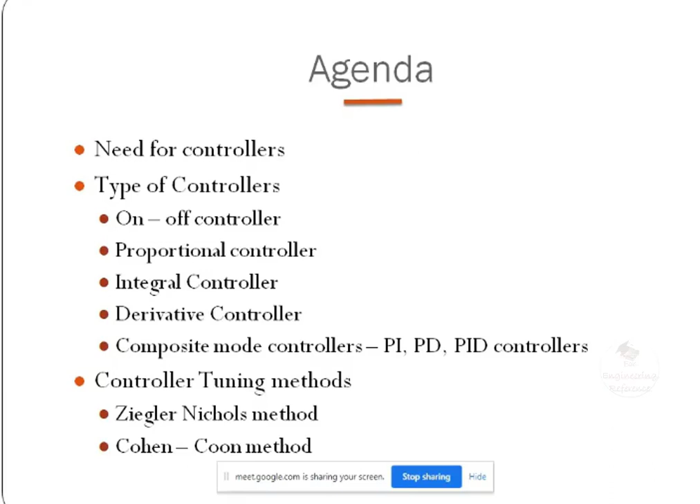Okay, so before we go to the regular presentation, what do you mean by a system? System is a group of components connected together to perform a specific task. Okay, so which means you people have gathered in ECE. The specific task is to get the bachelor degree in electronics and communication engineering.

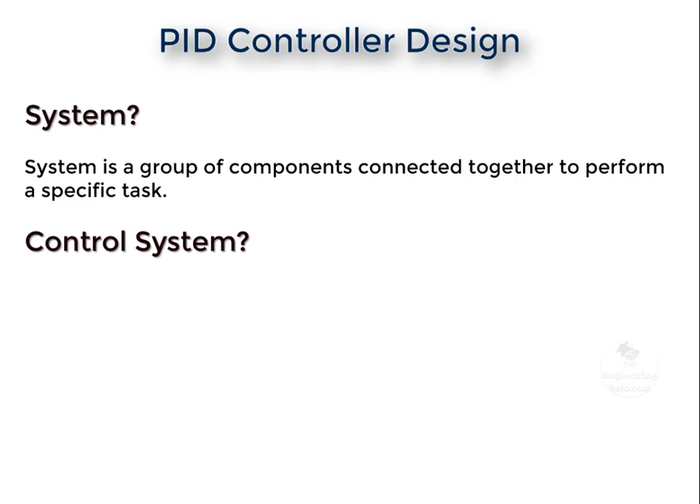But what do you mean by control system? Which means you have some control parameters like your class advisor, your HOD, your dean, like that. You have certain administrative roles. No? What is the purpose of those roles? Those people will work for you in order to make you reach your aim. What is your aim? To get the degree in electronics and communication engineering.

Okay. Likewise, system is classroom. And control system means the classroom with the controller, so-called faculties, HODs, deans, and whatever administrative roles you want to have. Right? So that is the difference between system and control system. And again, coming to control system, we have two major categories, namely open loop system and closed loop system. Right? What do you mean by open loop system and what do you mean by closed loop system?

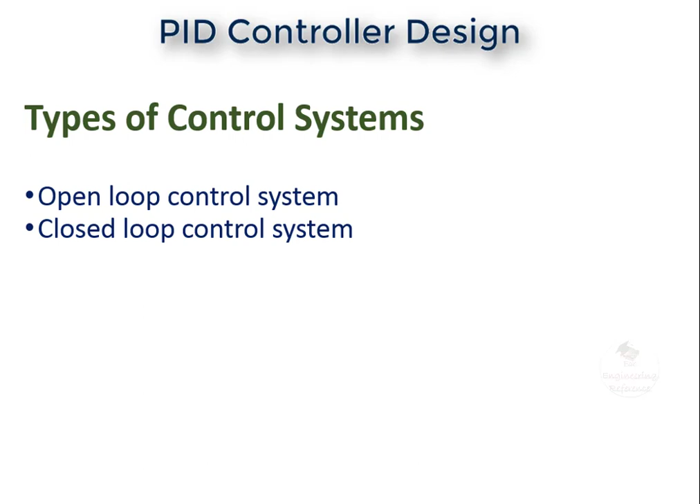Sir, open loop system, we can say in layman language, is a system without feedback. Open loop system, without feedback. Closed loop means? With feedback. Okay, good, good. So open loop system means we people are there, we are acting as a control system, we'll give the lectures and we will evaluate your paper and we are giving marks to you. That is your open loop system.

Closed loop system means based upon the marks you have obtained. Actually our aim is to get the pass mark. In our institution we have 50 as a pass mark. So 50 is my aim. If some student is getting 40, 45 marks, what is the difference? Some 10 marks, so why has he failed, and what action can I take on him in order to bridge the gap? So that is the role of a controller. So if you are acting based upon the feedback, that is called closed loop control system.

Open loop control system means we don't have any parameters, we don't have any feedback, we just give the input, observe the output and change the mode of control, that's all. Okay, so practically, if we say our traffic light control system is an open loop system, do you all agree with me? Because the purpose of traffic light control is to reduce the traffic at the signals. But what are we actually doing? We are not taking the human density anywhere, we just openly give 1 minute for all the roads, right?

If you are giving 60 seconds or 30 seconds for a particular road, on some other side we may have large numbers of people. So density may be increased. What is my ultimate aim? To reduce the people density. But because of our poor control actions, density may increase. Which means we are taking some control actions, but not based upon the feedback. So traffic light control system is a good example of an open loop control system.

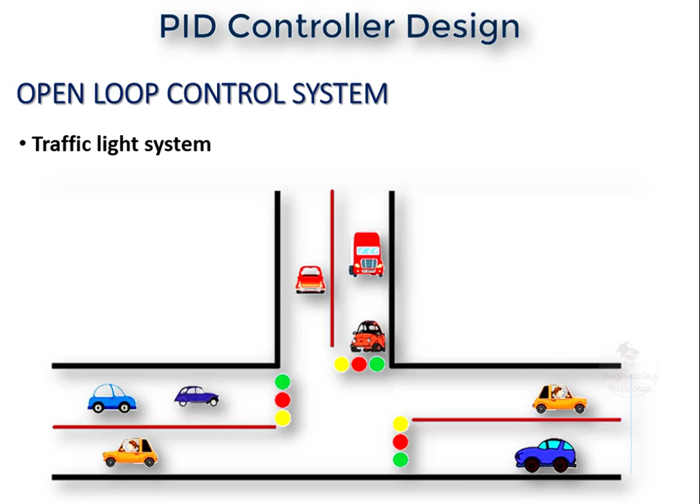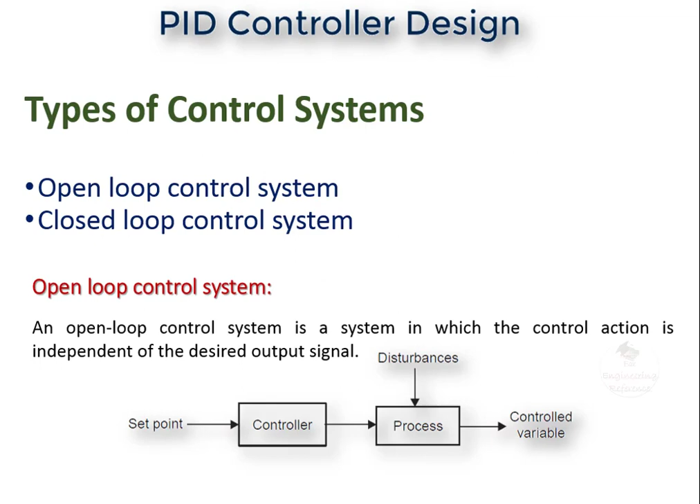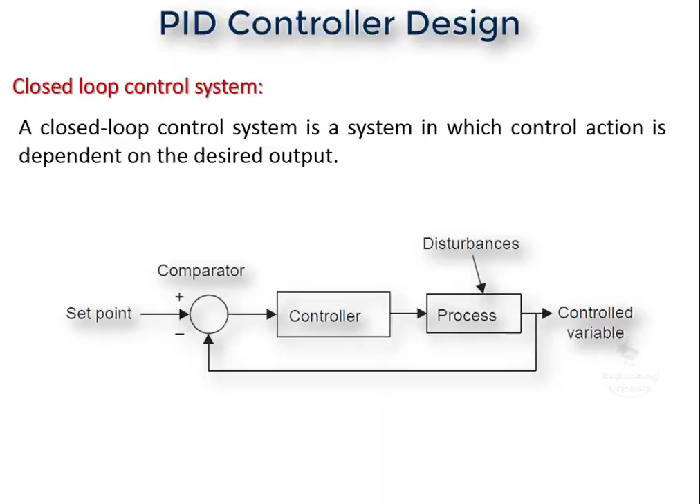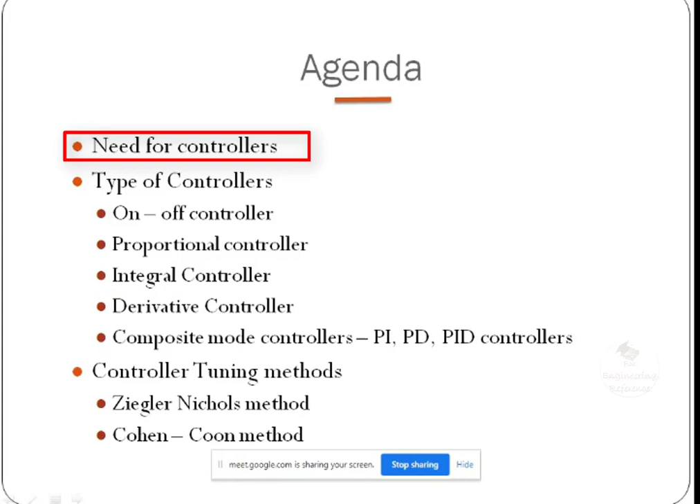Okay. So we have studied system and we have come to control system. In control system, we have classified two types, open loop system and closed loop system. So wherever you take control actions, there is a role for the controller, right? So what are the types of controller? That is what we are going to study in this session. First, we have discussed the need for controllers. Whatever control action we want to take, the controller will play the role. What control action I have to take and how I can make the system reach the set point, all those responsibilities lie with the controller.

Okay. Then we come to types of controller. Elementally, they started with the on-off controller. Then we migrated to proportional controller, integral controller, derivative controller. And composite modes are also possible: proportional plus integral, proportional plus derivative, proportional plus integral plus derivative. So all these combinations are possible.

Then controller tuning method means, if you have a particular type of controller, what gain value we should have, and depending upon the gain value, how we can design the controller. Those things will be taken care of by the Ziegler-Nichols and Cohen-Coon methods. These two methods determine what gain value we should have in order to make the system reach the set point. So there are two methods, Ziegler-Nichols and Cohen-Coon.

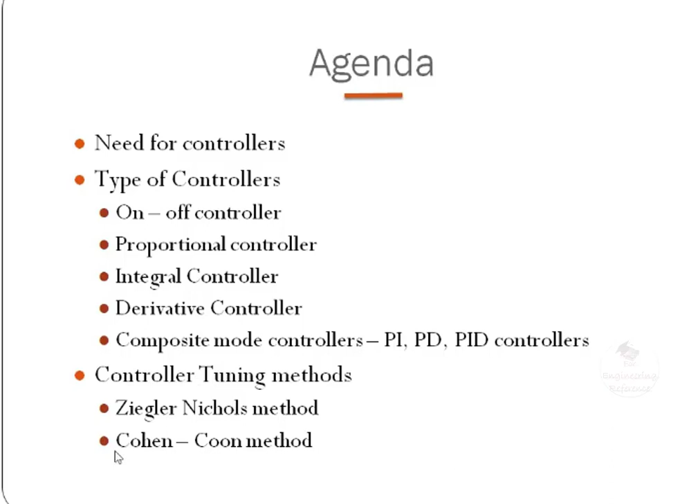Need for a controller: reference input, error, controller, control signal. Whatever error we have, that error is given to the controller. The controller decides what control action to take, which becomes the control signal, and this is given to the controlled plant where the final control element exists. The final control element is the person responsible for receiving the command signal from the controller, taking its order and executing it. Whatever is decided by the controller, this final control element executes, and that output is taken as feedback to compare with the set point. So our controller plays the crucial role - what control action has to be taken is decided by this controller.

In an on-off controller, we have only two options, either 0 or 1. Example is water heating - we insert the heater, which produces heat to increase the temperature. If we want to reduce the temperature, we just take it outside. We cannot decide what amount of heat has to be given - either we give 100% heat to the water, or we don't give heat at all. Only two things may happen: Boolean, either 0 or 1.

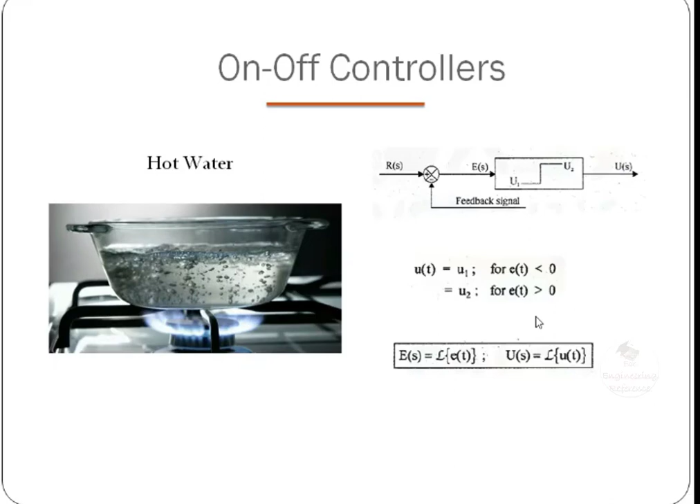So this control action u of t will be taken: u1 if error is less than 0, u2 if error is greater than 0. That's all, only two possibilities. If we want to increase the water temperature, we'll immerse the heater; if we want to reduce it, we remove it entirely. We cannot give 50% heat, we cannot give 60% heat - only 0 or 100%.

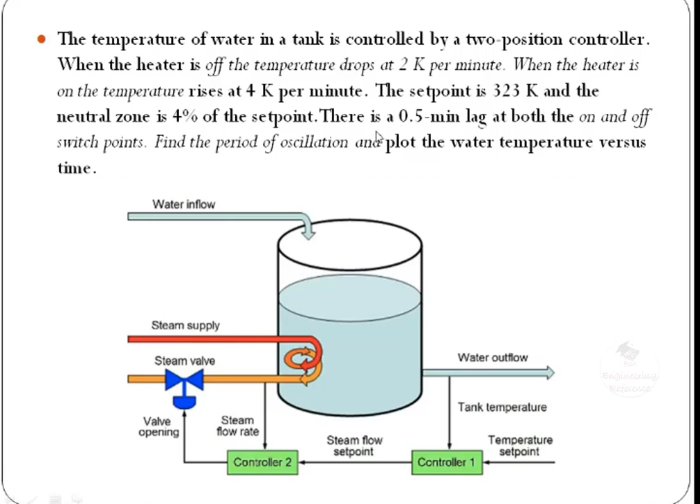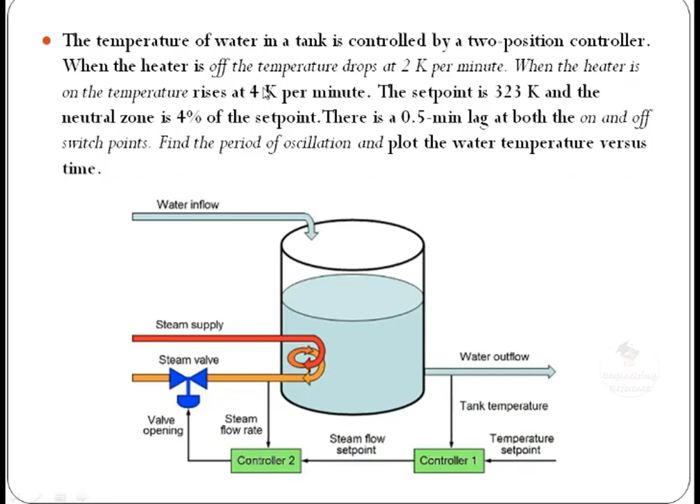On-off controller examples - see the same example. The temperature in the tank is to be controlled by a two-position controller. When the heater is off, the temperature drops at 2 Kelvin per minute - switching off the heater means we disseminate no heat, so per minute 2 Kelvin is reduced inside the water. If the heat is on, meaning we give supply to the heater, it starts giving heat to the water, so 4 Kelvin per minute will be increased.

I want to make the set point 323 degree Kelvin, and the neutral zone is 4% of the set point. Neutral zone means 323 with 4% gives about 12 - plus or minus 12 will be permitted, and within that range it can swing. There is also a 0.5 minute lag at both the on and off switch points. We need to find the period of oscillation and plot water temperature versus time. This 0.5 minute lag time means when you switch on the heater, it will not produce heat immediately, and it won't be experienced by the water immediately - that lag time is 30 seconds.

So what we can do here is give the heater, water inflow, and water outflow. We measure the temperature of the outlet water, and that is given to the controller, which decides whether to give input or not via steam. They are not directly giving heat with a heater - by sending steam, they are increasing or decreasing the temperature. Steam means heated water or heated gas sent inside, which gives heat to the water. This steam supply is controlled by switching the heater on or off, which affects the steam supply, and that in turn controls the temperature of the water.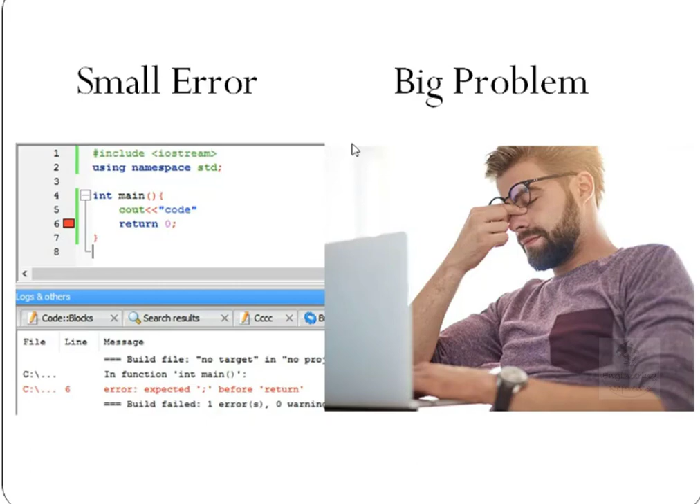In a very similar manner, the proportional controller will act. Always the transfer function is defined as the ratio of Laplace transform of output to the Laplace transform of input with zero initial condition. That is the proper definition for transfer function.

So please keep this in your mind. Always transfer function will hold for zero initial conditions. It will not be working for the initial conditions. It should have only the zero initial conditions.

If at all, only then we can apply the transfer function concept. If there is no zero initial condition, definitely we cannot hold the transfer function for that particular system. So here I'm taking Laplace transform on both sides.

For controller, you can go back to the controller design. For controller, what is my input? Error. And what is my output? That is control signal. So what is the transfer function of a controller?

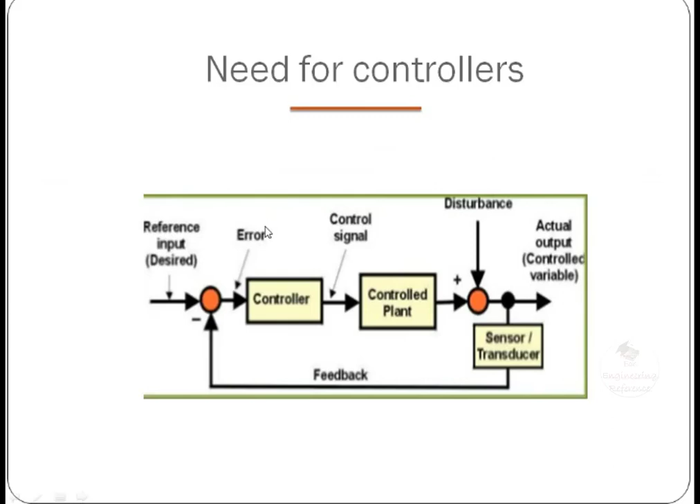Laplace transform of output to the Laplace transform of input. I am notating U as my control signal and E as my error signal. So E is my input and U is my output. Laplace transform of output to the Laplace transform of input with zero initial condition means U of S divided by E of S. That is what I have taken here.

U of S by E of S is equal to Kp. So I am introducing a Kp here. That is what you are controlling. In place of controller, I am giving the Kp.

So what it will do, Kp is a simple gain, some 5, 10, whatever the value, depending upon the problem. So it will multiply my error and produce the control action. It will magnify the error and give commands to the final control element.

Coming to integral controller. Integral controller means this controller produces the output proportional to the integration of the input. It is not directly proportional. It will integrate the error and give the output.

Again I am emphasizing error is my input. Error is nothing but the difference between actual and desired. My control action is directly proportional to the integral of E of t dt.

What do you mean by integration? Integrating means we are accumulating, we are adding, right? Which means my integral controller will not take the present error. What it will do is track the entire history.

What is the error at 0 time and what is the error now? Put together, what is the error? It is not taking only with respect to this time. It is taking for the past values also, from the 0th instant to present instant, what is the value?

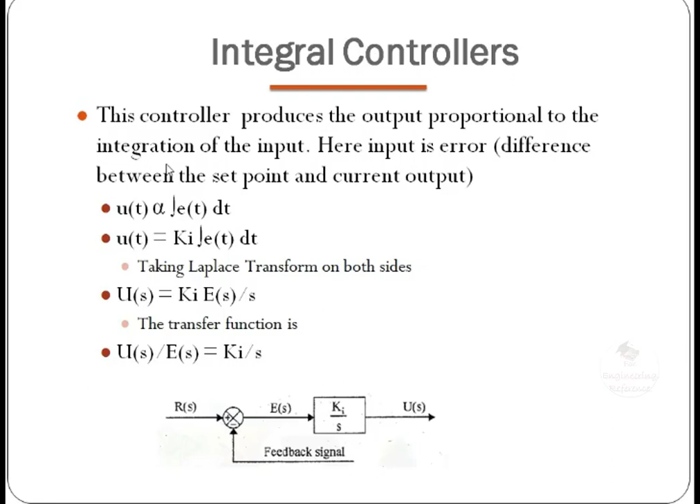Okay, proportional we have studied, integral we have studied. So proportional you can keep as the present value alone. What is the error now? It will take control action. But integral means it will not consider the present value. It will take the entire past history. That is your integral controller.

So obviously we have one more controller called derivative. My derivative controller will work on the future value. It will not consider the past. It will not consider the present value. It will focus on future alone. What stage we are now, it will not think. It will think what we may be at 10th second, at 20th second, at 30th second. It will focus only on the future.

My output control signal is directly proportional to the derivative of the error. To remove the proportionality, we have to introduce a constant called Kd. Kd stands for derivative gain. If you are taking Laplace transform on both sides, we will get U of s is equal to Kd into s into E of s. So my transfer function becomes U of s by E of s is equal to Kd into s.

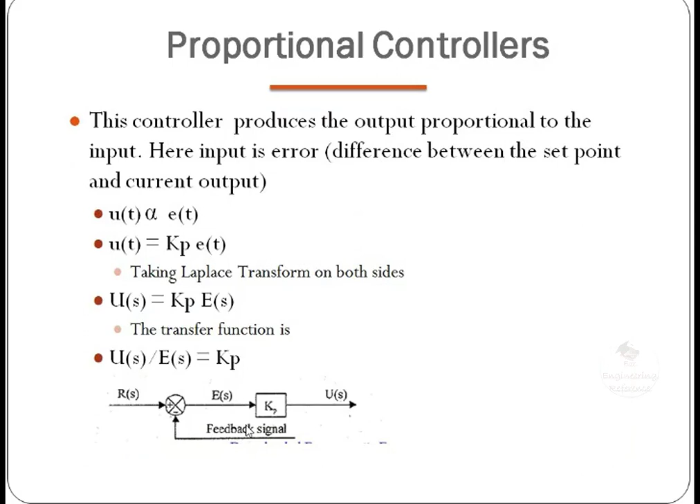See, proportional will work on the present value, integral will work on the past value, and derivative will work on the future value. A single mode controller cannot hold a good control action. It will need the combination of all. It is a teamwork. So that is PI, PD and PID controllers. From the name itself, P means present value. PI means what combination? Proportional and integral. What values is it taking? Proportional plus integral means past and present. Yes, past and present.

Now you think, if you know about past mistakes, what I have done and what I can do now, will you shine? Up to a certain extent, PI. But I know the present and future. Which will hold good, PI or PD? PI means present and past. PD means present and future. Based upon our previous things, we can decide what we can do. But PD means I don't know the history. Just I want to focus on the future. So compared with PD, PI holds good. But PD is not widely used because just focusing on the future without any past history will not be effective; it will not give good predictions.

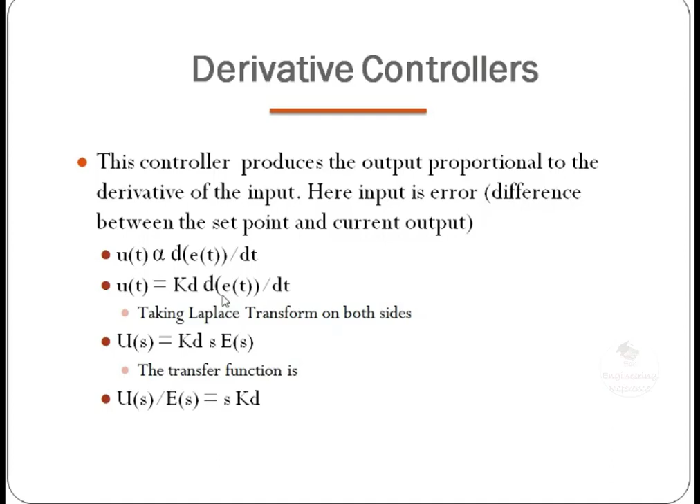This is a famous 2-mark question we used to ask the students: why can a derivative controller not be used alone? Logically, because of focusing on the future value alone. Mathematically, it is rate of change; if a constant error is there, rate of change will be 0, so no control action will be performed. Okay, coming to this, PID is the first controller which holds good. Below PID you will have PI, below PI you will have P, below P you will have PD, below PD you will have I, and derivative is the bottommost one which cannot be used anywhere.

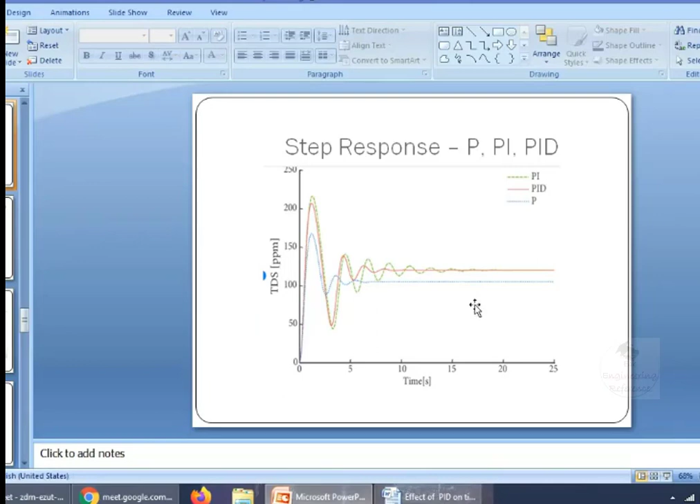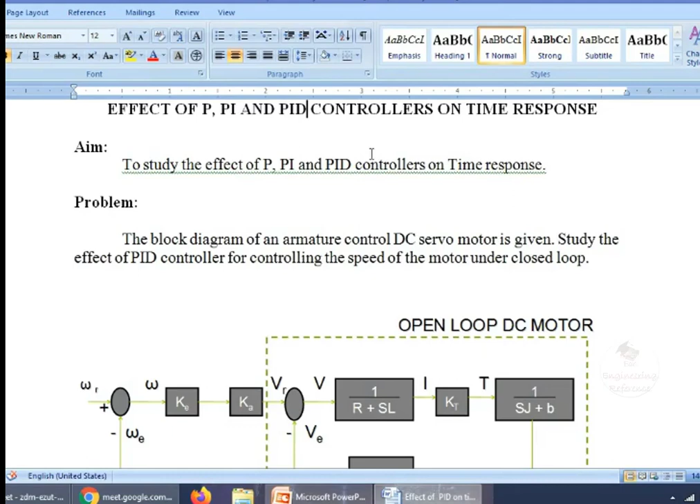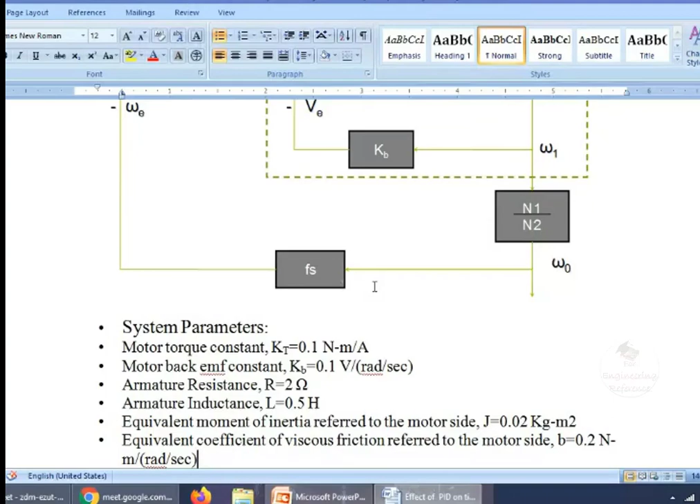See, before moving to the response, I can show you an experiment we have conducted in our laboratory through Matlab software. In this Word file, I am studying the effect of P, PI and PID controllers on time response. The system I have chosen is the armature controlled DC servo motor. This is the classic example we usually choose. You consider this DC motor as a system. Don't go beyond that. And you will have amplifier gain and error gain. This is a system. And the system parameters I have chosen: what is KT, what is Kb, what's the armature resistance, all those things I have taken.

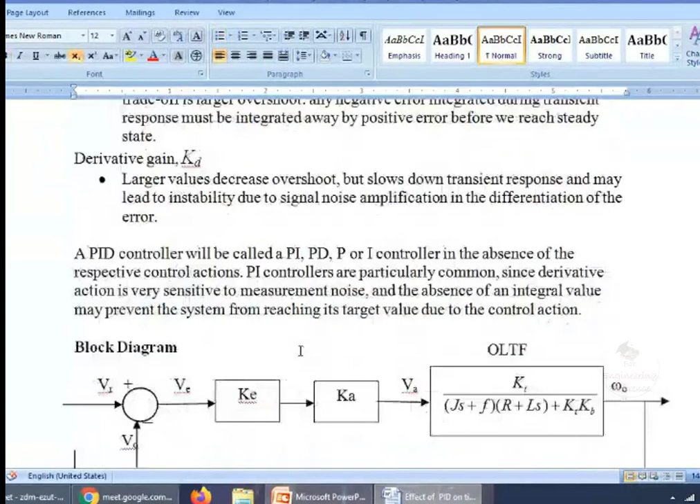And the PID controller mode is for your knowledge. What response I am getting is the emphasis here. See, my transfer function is KT divided by (JS plus F) into (R plus LS) plus KT into KB. This is the system I have chosen. In my laboratory, I have chosen this as a DC servo motor. This may be any system. So Ke is my error gain and Ka is my amplifier gain. This is my open loop transfer function.

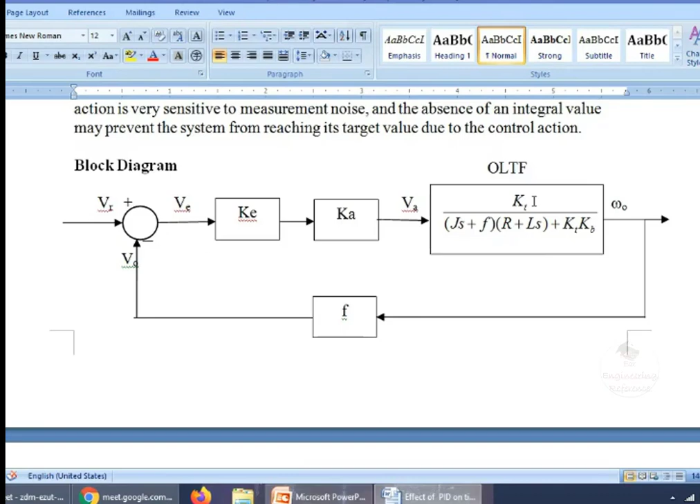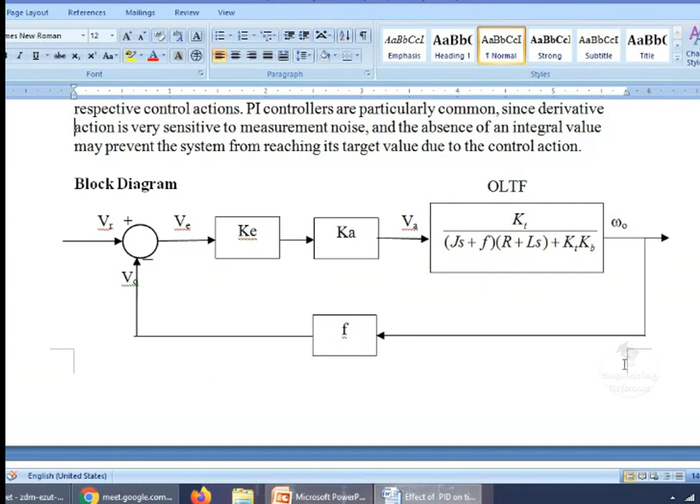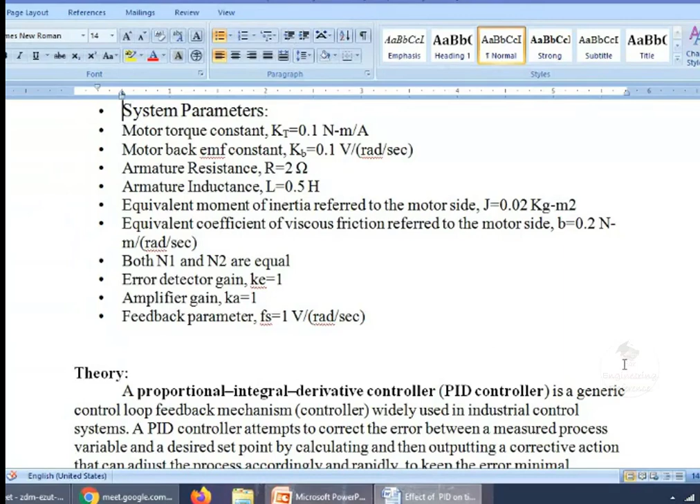And response without controllers. We don't have any controller, we don't have any control action, right? Error gain is taken as 5 and amplifier gain is 1. And this is the transfer function I have calculated. You may ask, sir, you have so many letters, how can you arrive at this value? By conducting experiments I have got these values: the motor torque constant, back EMF constant, armature resistance, inductance. I conducted the experiment in my laboratory, fitted them into this transfer function, and got this value.

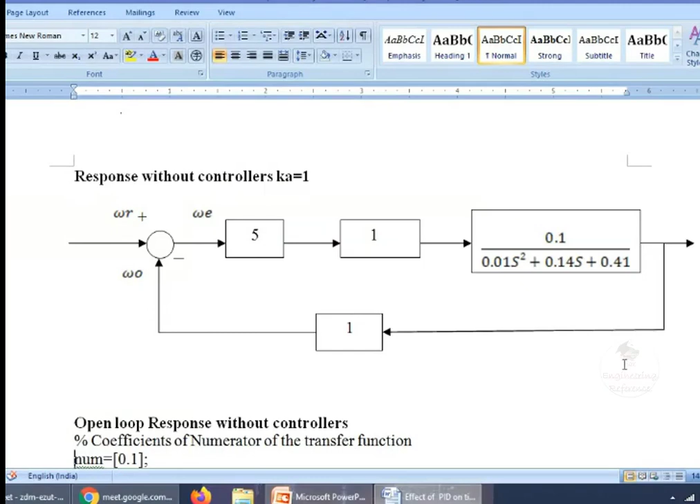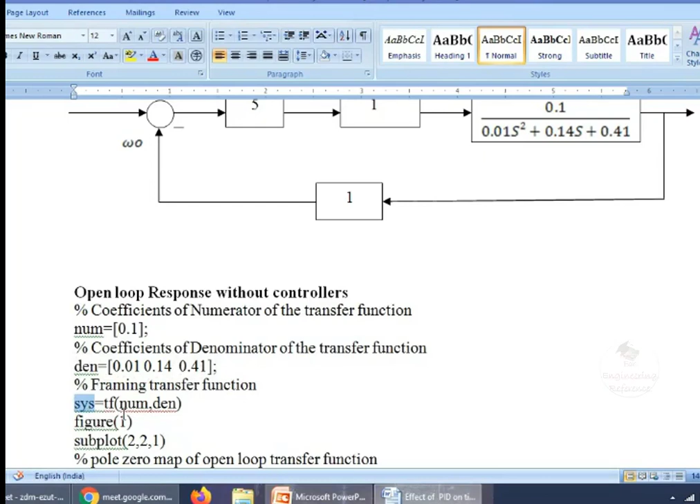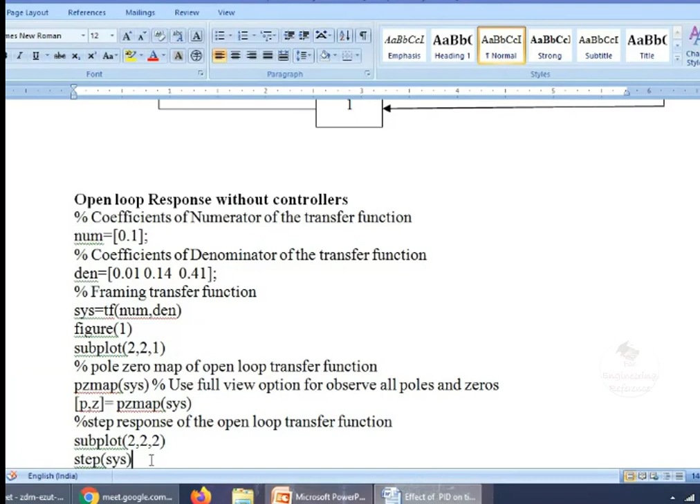This is my response without any controller. So first we have to declare numerator and then denominator. We will get the system. So system is equal to transfer function of numerator comma denominator. And for that system, I have plotted the pole zero plot and taken the step response. This is the open loop system alone. We are considering the system alone, giving input and getting the output without any controllers.

Next one, closed loop without controller. That was the open loop system. Here, closed loop system. I am bringing the feedback with gain 1, unity feedback, which means at this junction I am introducing these two values.

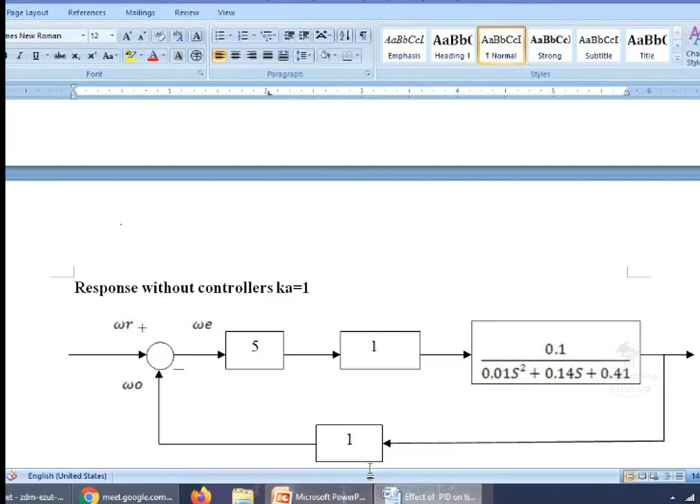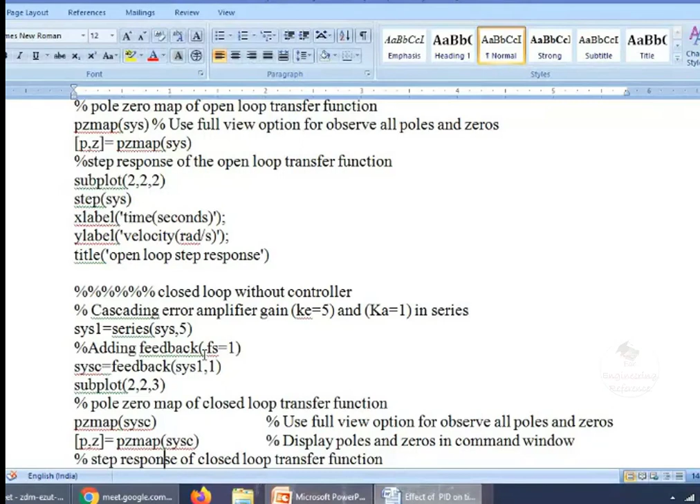Open loop means only this system, 0.1 divided by 0.01 s square plus 0.14 s plus 0.41. I am giving input and will get the output. Feedback means without any controller, just I am taking the feedback with this Ka and Ke alone. So I am making the feedback: series of system comma 5, and I am taking the feedback for the system with unity feedback. One stands for unity. And for that system, I am taking the pole zero plot and I am getting the step response. These things we have to put in the Matlab.

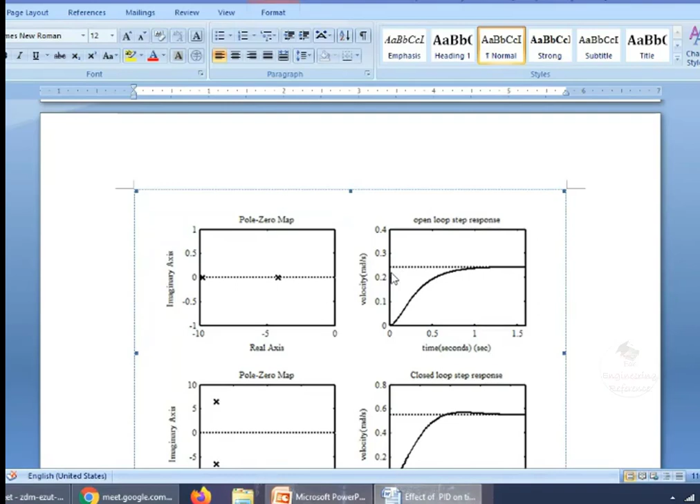See, open loop system response without any controller. I am not introducing any controller, just a response. My ultimate aim is to reach 1. That is unity. Step input only I am going to give. If I am giving 1 as input, without any controller, without any feedback, I am getting 0.22 or 0.23 as my output. Okay, so error is huge, almost 0.8, 80% error is there.

Then I am bringing the closed loop system and it is trying to reach almost 0.6, not exactly 0.6, 0.58, like that it is reaching. So here also I am getting almost 40% error. So first system is open loop, there I am getting 80% error. Then second system is closed loop without any control action. So there almost 40% error is there. Okay. So what I am going to do at the next level,

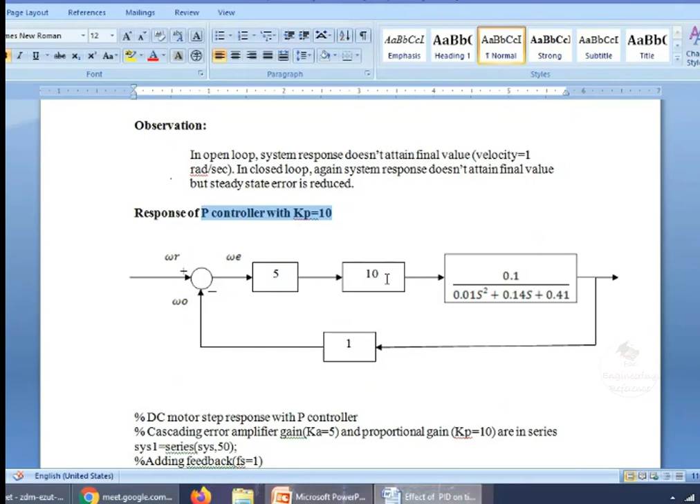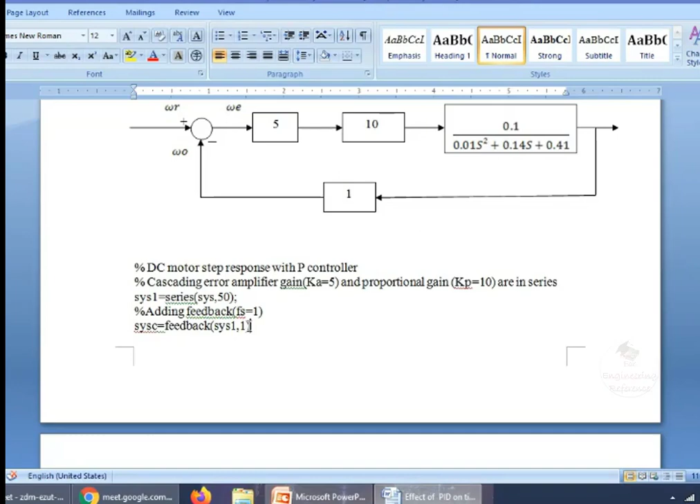I am introducing a proportional controller with the gain of 10. Same logic, series of system with 50. Why am I introducing 50? 5 into 10, this can be multiplied. So 50 in series with the system 0.1 divided by 0.01 s square plus 0.14 s plus 0.41. And this is feedback with the gain 1, so unity feedback. And for that also I have plotted the pole zero map and I am taking the step response.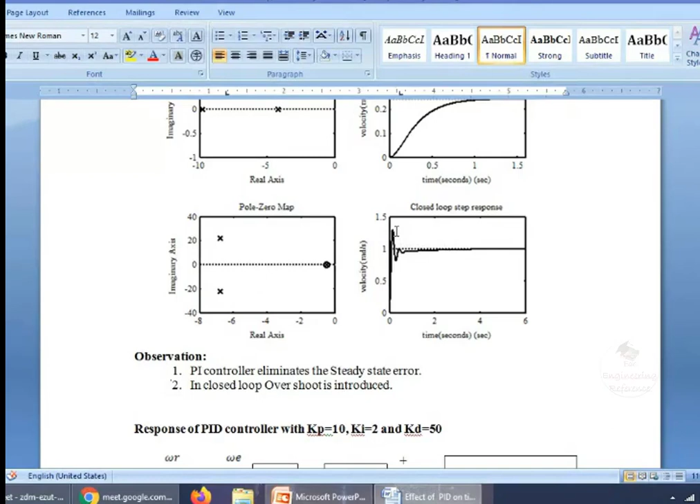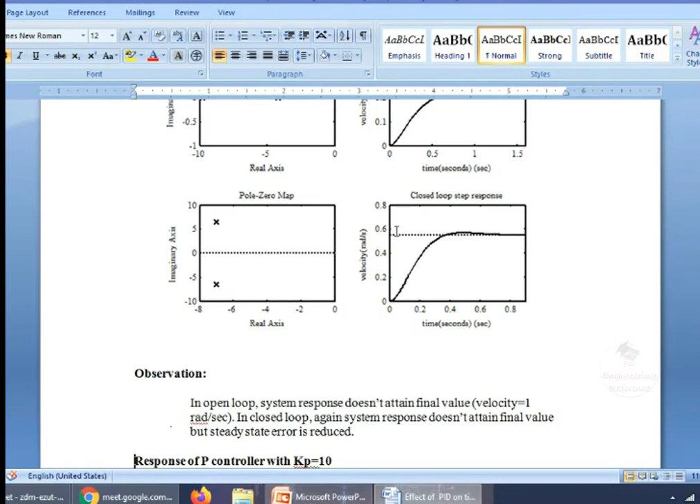See, it is reaching the 1, but it is giving overshoot compared to the previous case. So I'll read out the observations then and there. Without any controller, what is the observation? In the open loop system, the response doesn't reach the final value exactly. But in the closed loop system, it is reaching toward the set point, and steady state error is reduced. See, in the first case we are having 80%. For the second case, we are having 40%.

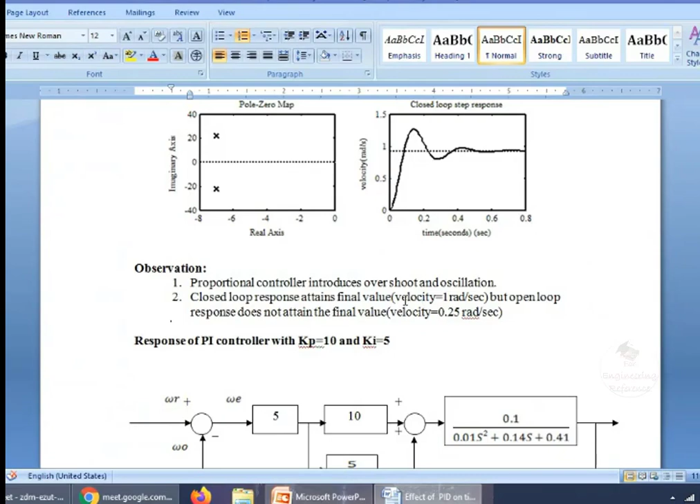So in order to reduce it further, I am introducing a proportional controller. What is the output of the proportional controller? Proportional controller gives overshoot and oscillations. For this case, it is producing the overshoot, but definitely it will produce oscillation. See, compared with the previous two values, the steady state error is further decreased.

Again, I am introducing the proportional plus integral. PI eliminates the steady state error. Almost it nullifies to 0, which means 0.98, 0.97, like that it will take. But overshoot is maximum compared with the previous case. Overshoot means this peak overshoot. Okay. So why is it necessary to reduce the overshoot? Can anybody say? Why do I have to reduce the overshoot?

So think about valve control. If I am giving the control action P plus I, it is moving to the high peak. Think about the mechanical assembly. If you are going to a high peak, what will happen? Say, for example, there is one valve. In that valve, you are having the position. If that position is going to the highest peak and coming down, going to peak, coming down, sudden movement from positive to negative, what will happen to the mechanical arrangement? Whether friction will be more or not, whether damage will be more or not.

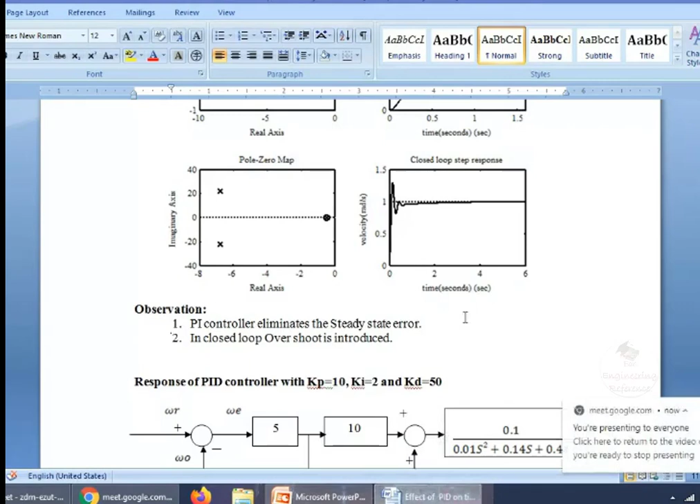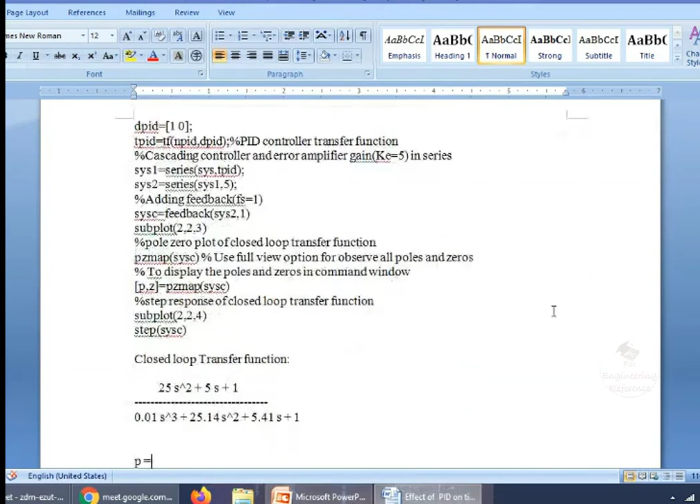Yes, sir, there will be more damage. Yes, because of sudden increment and decrement. So it will cause damage to the particular system. So overshoot has to be reduced. For that, I am introducing the derivative controller. Again, 50s is introduced. So the same procedure I have done. I have got the output. It is reaching the set point without any overshoot.

But the problem is settling time will be increased. So settling time is reduced means, literally, it is not reduced. It is increased actually. If you are introducing derivative, it will introduce a sluggishness. If I want to focus on the future, definitely there will be a time lag. Okay, so the sluggishness will be there. That is the drawback of PID controller.

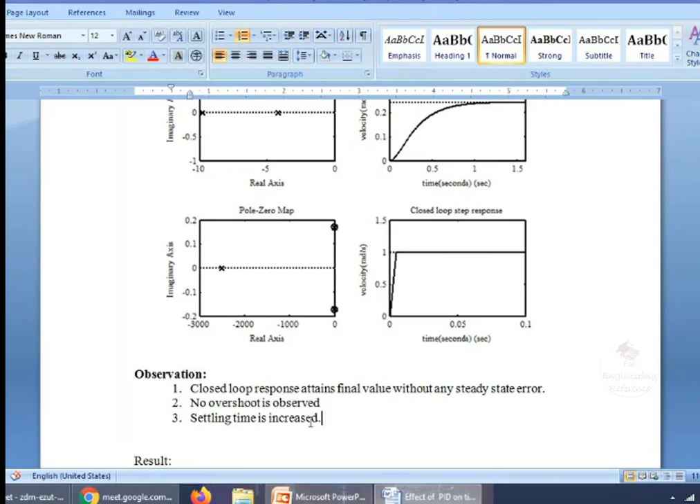Let me narrate the drawbacks of the controllers sequentially. Proportional will reduce the steady state error, but still there is a large steady state error possibility to reduce. Then proportional plus integral means steady state error will be reduced, but there is an overshoot. And if I am introducing proportional plus integral plus derivative, my overshoot is nullified, but the problem is there is a slight time delay in order to reach the settling time.

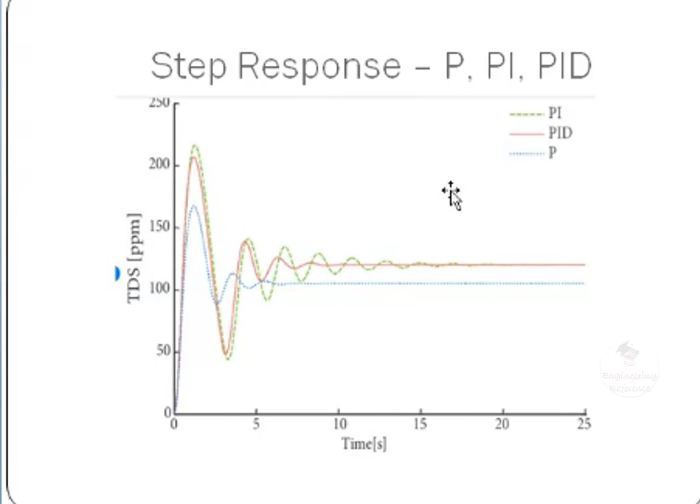So to reduce the overshoot, I am introducing PID. Red color. What has happened? The overshoot reduced, but still there is a scope for improvement. Overshoot is reduced and it is reaching the set point before the green color. So it will be more clarified with this slide.

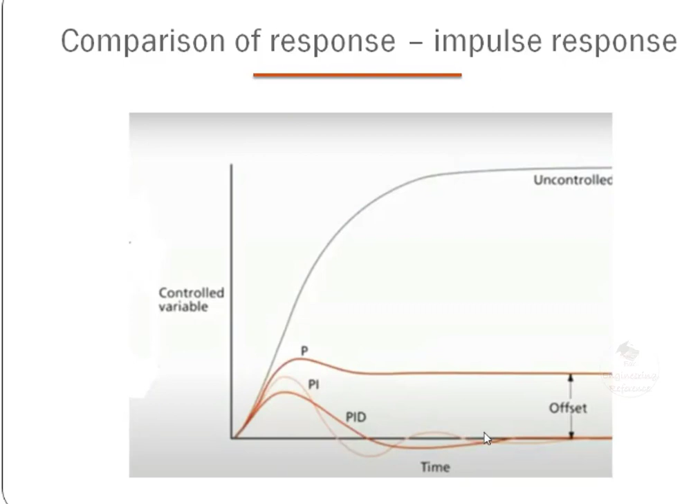Without control action, we need not say about the set point. If I am introducing P, the error is reduced. I am introducing PI, overshoot is there, but it is reaching the set point. And PID is reducing the peak overshoot, but it will take time to reach the set point. P will be faster, and compared with P, PI will be less fast. PID is sluggish; slow response will be there. So that is what I have tabulated here.

Introducing KP will decrease the rise time, it will increase the overshoot. Settling time, there is a small change. Steady state error will be decreased. For an open loop or closed loop system, if I am introducing a proportional controller, rise time will be decreased, overshoot will be increased, there is a small change in the settling time, but a drastic change in the steady state error.

If I am introducing Ki, it decreases the rise time and increases the overshoot. Settling time initially decreases, but it is increasing. Steady state error will be eliminated. If I am introducing Kd, overshoot is almost reduced. Settling time is also decreased. There is a small change in the steady state error. This is the effect of P, PI, PID controllers.

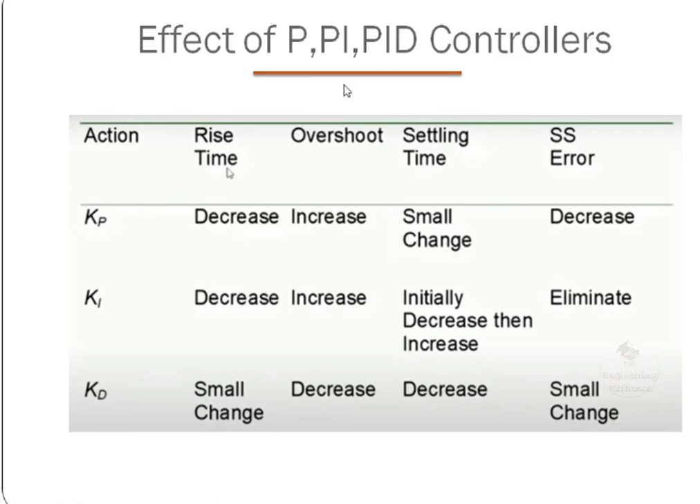Next, applications. Where can we use them? P, as I told you, means present; it eliminates the present error value alone. When to use? Systems with slow responses. Systems tolerant to offset. If the offset does not have much emphasis, we can use the P controller alone. Examples are float valves, thermostats, and humidistats.

Integral means it eliminates the history of the error. It is not often used alone, as it is too slow, because we are taking the entire history. It is used for noisy systems. And D controller focuses on the future, it looks forward. It is not used separately because it is too sensitive to noise and does not have sensitivity to the set point.

As I already told you, derivative controller cannot be used alone. The logic, why? Because the rate of change of error is calculated. If the error is constant, rate of change of error will be 0, so it cannot be used anywhere alone.

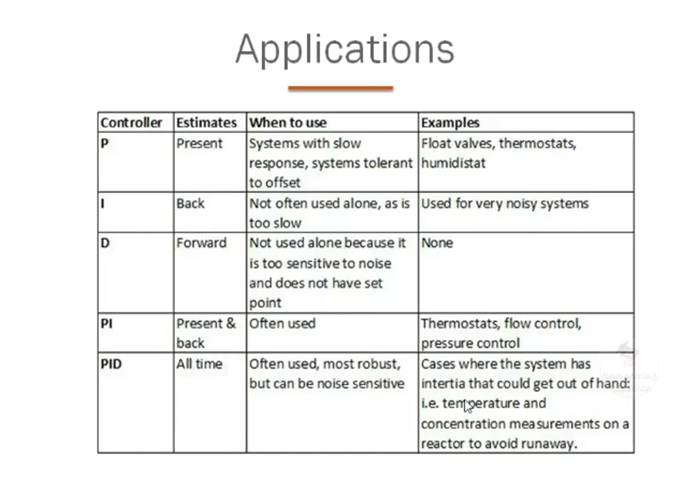Next one, P plus I, present plus past, often used in thermostats, flow control, and pressure control. Whereas PID is taking all. It is often used, it is more robust, but can be noise sensitive. It is used in cases where the system has inertia that could get out of hand, such as temperature and concentration measurements.